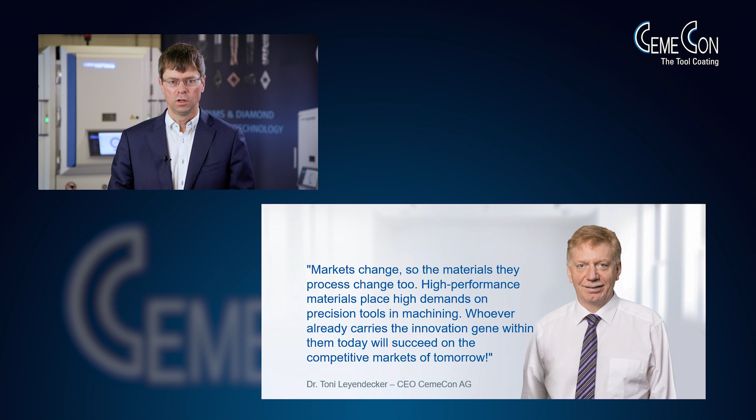Today, about 80% of all tool coatings based on titanium aluminum nitride. I would like to talk to you about diamond and HiPIMS, the logical development or following technology out of sputtering for cutting tools, for cutting tool coatings, and what is the market impact for your products out of these technologies.

Where are future markets? And of course, there is definitely something to produce for cutting tools and for us as a tool coater.

In developed markets, like here in Central Europe or wherever, the average age of the population is steadily increasing. And of course, more people will need to go for a hip implant, a knee joint, or whatever to maintain their mobility. And of course, society in developed countries will donate the necessary money, the necessary funding into healthcare to give also people needing such implants a good life.

The production of these implants today is mainly out of chromium cobalt, a very nice market for cutting tools because chromium cobalt is very hard to machine. Here we need a dense coating, being good for a challenging material like chromium cobalt.

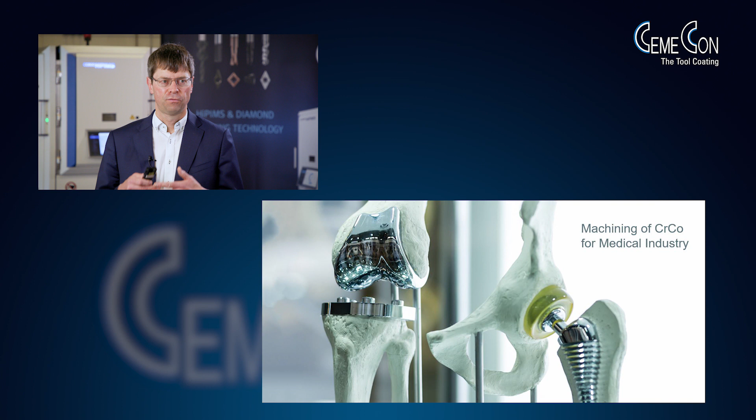And another thing is quite special in this market. We need a perfectly machined object because these implants are going into the human body, and every damage to the surface is a potential place where bacteria can nest, what of course is an absolute no-go and must be avoided. So smooth HiPIMS coatings generating a perfect surface are the first choice for such a product in the medical industry.

Another example from the medical sector is making dental implants from zirconium oxide, milling blanks from zirconium oxide with the individual shape and generate the implant online in a CAD/CAM system. A fully new way of doing this.

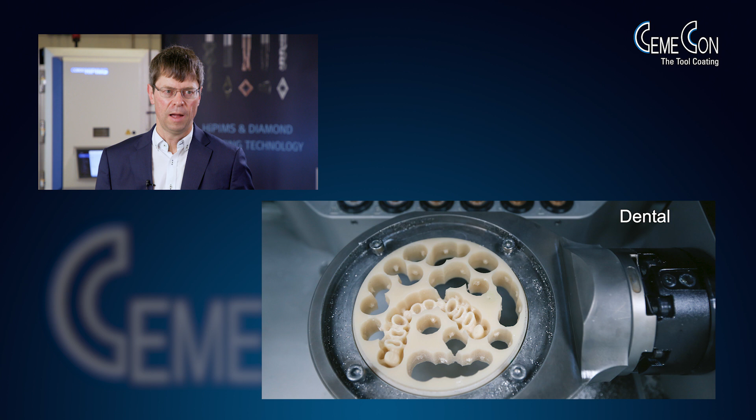The good thing for you as a cutting tool maker, you can use your tool making knowledge together with our diamond coatings for a new market, which is not subjected to the typical ups and downs in metal cutting industry and in engineering.

Well, we all have learned in the last half year how essential communication to all of us is. We all have sat hours and days in front of Teams, Zoom, and whatever video system. And 5G technology, the next thing in communication, will come. And we all will invest in this to be prepared for a similar situation like what we face in the moment.

A telephone, a tablet is today a metal frame, aluminum, some are made out of stainless steel or titanium, and a lot of milling tools are used to shape these frames and to generate a perfect surface. Here it's about milling tools, micro milling tools.

For micros, you must have a droplet-free surface. Droplet-free is HiPIMS, so that's a quite big benefit for micro tools. And the other thing, a micro has a very sharp geometry, so you must find a way to bring down the stress in the coating so that you have fully coated cutting edges.

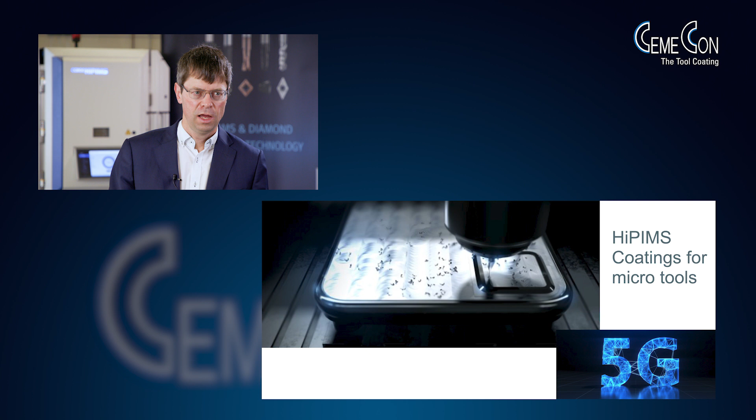Communication and medical industry are definitely rather interesting markets where we can immediately generate new business with HiPIMS coatings.

You might now ask, what is so special about this technology? Why is it so different? When you just take a look into a HiPIMS machine, the first thing you notice is this very bright, very white color of the cathodes, already indicating just from the color impression that there is by far more energy in the plasma than what you used to know from any other process.

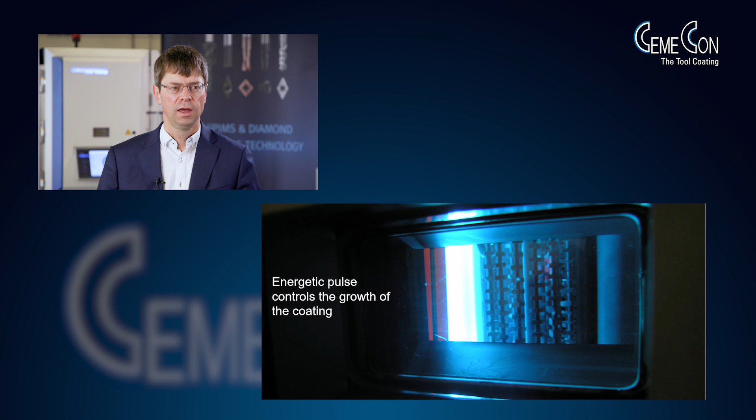That's the basic idea behind HiPIMS: not putting the power constantly on the cathodes, but putting the power in short power pulses, high power impulse magnetron sputtering on the cathode. In the pulse, enormous amounts of energy, giving an almost 100% plasma ionization, but it's still sputtering. So you keep a droplet-free coating and you add energy to the process.

Here, it's clearly visible from the geometry that the coating must be very tough, very dense, and you must find a way to bring down intrinsic stress to cover such a sharp geometry homogeneously. Stress management, that's a fully new thing, what you can do by tailoring the HiPIMS pulses in the right way.

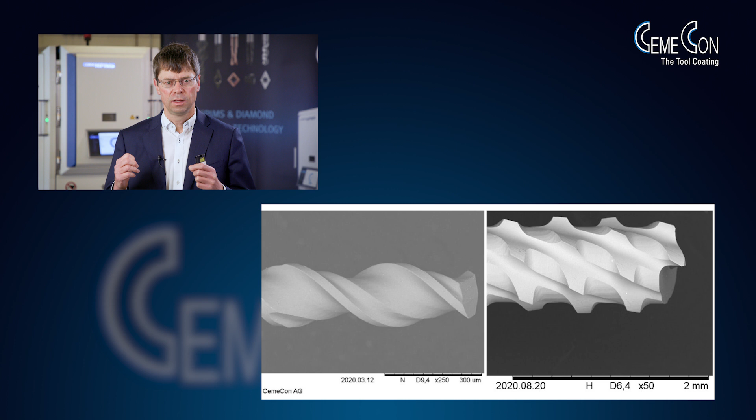Another very good example from a fully different type of tool, indexable inserts, is Ferrocon Quadro, the first product with 12 micron PVD coating, a so far fully impossible coating thickness.

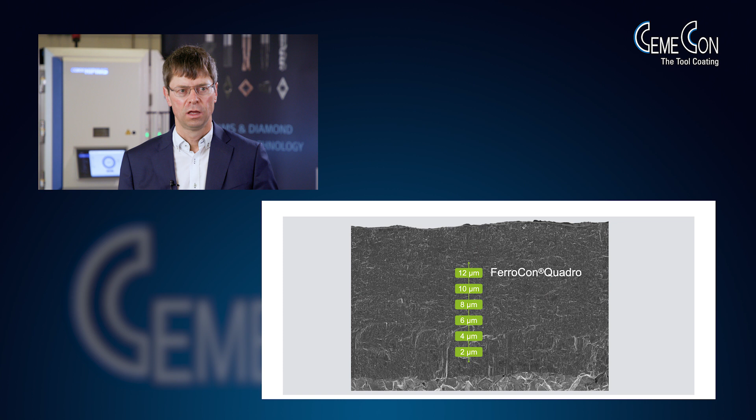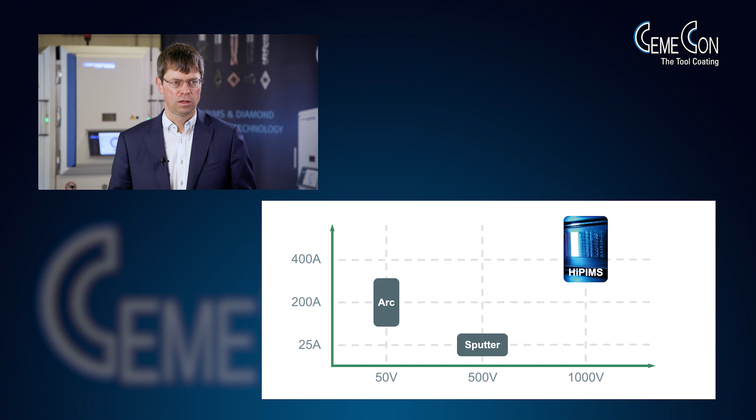You might now ask, why is HiPIMS so different from other technologies, from other traditional coating technologies? The point is that in the pulse, where the plasma is generated from the cathodes, we have at the same time high voltage and high amperage, driving a lot of energy into the plasma. And this makes it so different from other things where you have either high voltage or high amperage.

Well, we talked about stress management. How can we come a bit closer into this quite difficult technology? Well, from your tool point of view, you grind a nice surface, you prepare your cutting edge, you do a honing process, and then you give it to a coater, and when you get it back, you see this.

Spallation of the coating, peeling, or the cutting edge is no longer coated fully. You see at some spots even the carbide. Obviously, the intrinsic stresses in the coating were not fitting to the geometry. Well, how to avoid this?

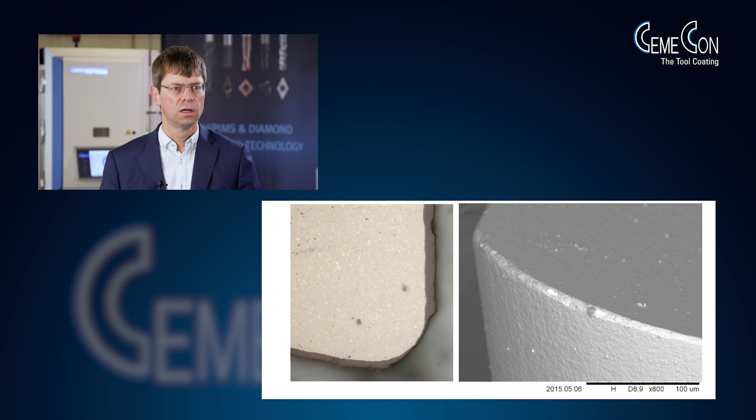The key technology step forward in HiPIMS is that we as CemeCon were not just looking into putting pulses on the cathode, but analyzing the process and synchronizing the pulses on the cathodes with what's going on the bias table. On the bias is your tool placed and is receiving the material from the cathodes.

From the cathode is coming during the pulse the metal from the target. That's of course what we want for making the coating. But on the other hand, there are in the plasma, just from the nature of the process, some unwanted additional species. These should not go into the coating grid because they distort the grid and create stress. The thing in HiPIMS synchronization for selective ion biasing is attracting the metal coming from the target, that's what we want, and suppressing the unwanted parts.

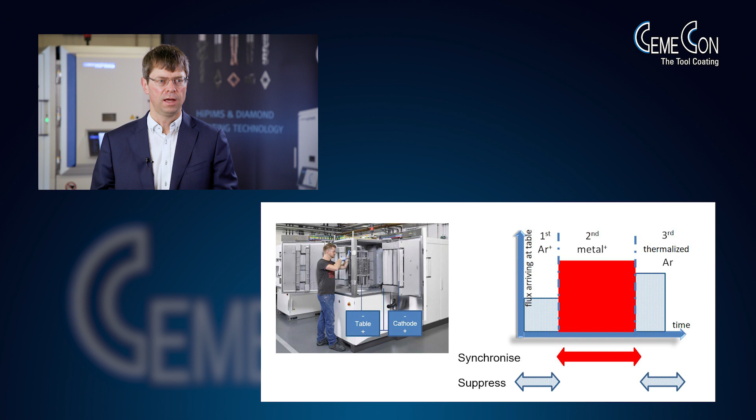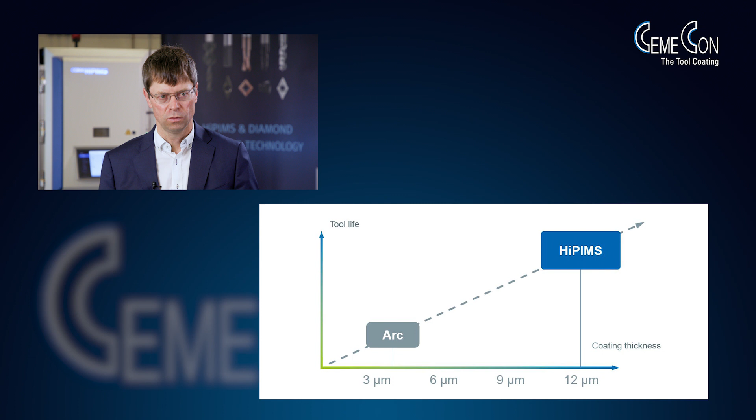This process knowledge is now incorporated in our CC800 HiPIMS and is key to bringing down intrinsic stresses in coating. When you incorporate this machine in your production, you can apply it in-house on your products. The benefit is you can increase coating thickness a lot. In traditional technologies, your limit on an industrially produced insert will be around 4, maximum 5 microns. Now with stress management, we can do it on an industrial scale with 12 microns with Ferrocon Quadro, day after day in standard production. This is a real step forward and makes HiPIMS and the CC800 HiPIMS very different from a CVD process where you can apply a thick coating, but always with tensile stress.

Tensile stress is okay for turning, but is a no-go for interrupted cutting like milling. And the market is clearly going for heavy-duty machining in the milling direction.

The good thing in HiPIMS is control over the process. Intrinsic stresses are not bad by their very nature. When you go into a church, the roof is only supported by stresses on the keystone, or the bridge you are driving over is only capable to bear vertical loads by highly stressed steel wires in the concrete. There are applications in the cutting tool market where some intrinsic stress is helpful.

Here's a typical example from the mold and die market: a ball nose end mill where we need abrasion resistance and hardness to machine, for example, 65 Rockwell hard material. So the point is we can actively influence intrinsic stresses with the CC800 HiPIMS if we want them, and influence them in the right way and the right value. That's one of the key points of the HiPIMS technology and the CC800 HiPIMS. You can do the full range of products with very different properties and very different requirements.

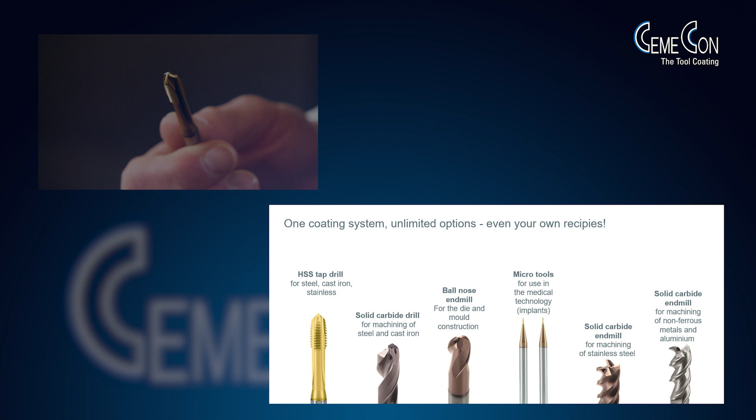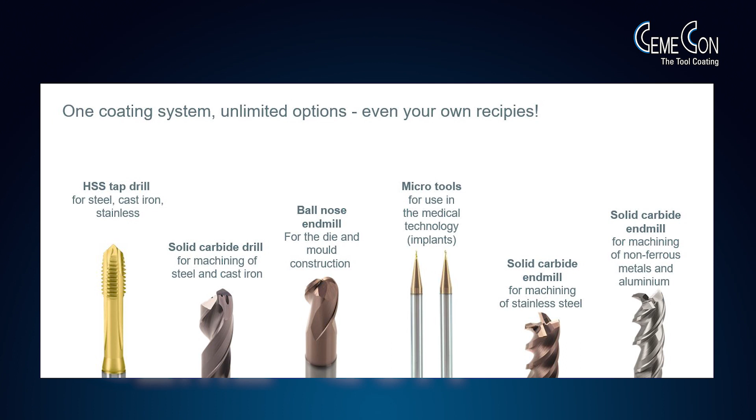Here from a tap drill, where everything is about reducing friction, droplet-free coatings, having low torque while tapping. In the middle you see a micro cutter, droplet-free, low stress, to have a thin coating around a very sharp geometry. On the right hand side you see milling cutters where you would like a bit more thickness, but you must have toughness in the coating to fulfill interrupted cutting on the best possible level.

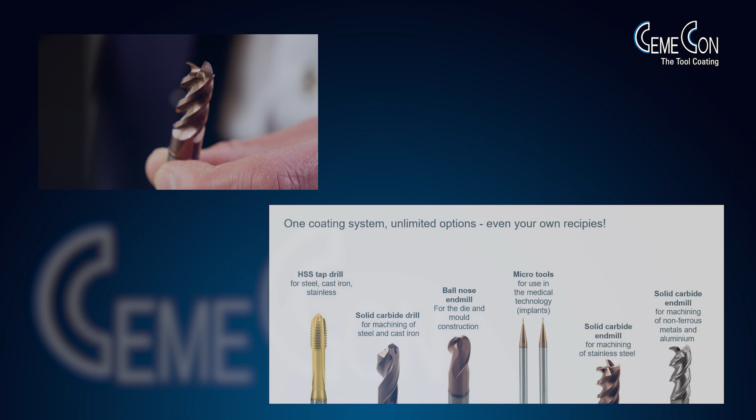The same goes for indexable inserts, a completely different type of tool. Also here quite a variety. On one side we see an insert with an aluminum geometry, quite sharp. This is also a good example for the flexibility of the CC800 HiPIMS. The coating here is titanium diboride, a material you can easily sputter but not with any other technology, and it avoids the adhesion or sticking of aluminum to carbide. A good example to show the flexibility and versatility of the CC800 HiPIMS.

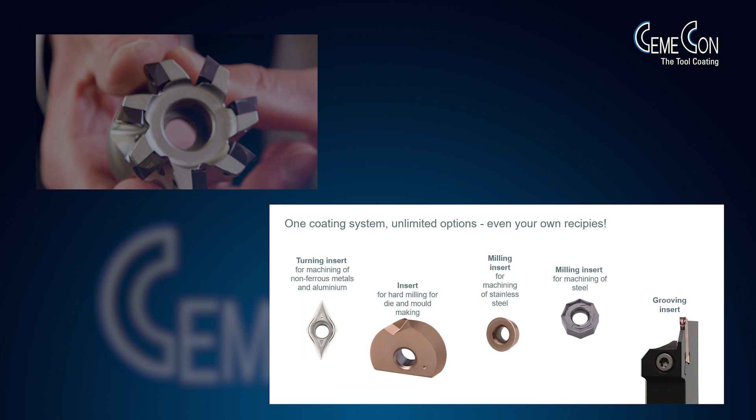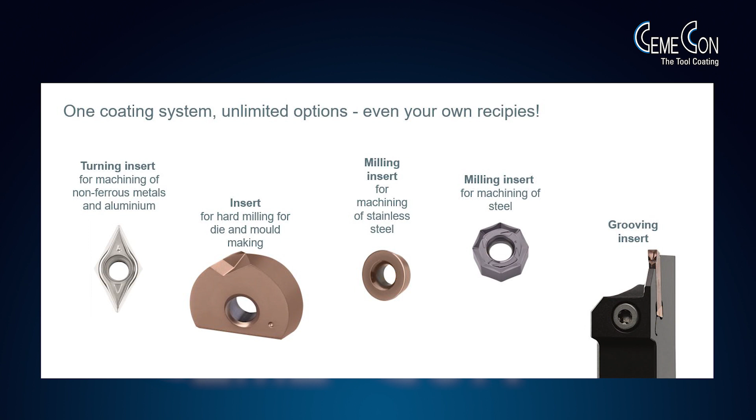You can deposit almost any material on any substrate, whether it's carbide, CBN, or ceramic. On the other hand, with the same machine and different process data, you can do a very thick coating like Ferrocon Quadro on a heavy-duty milling insert, like this octagonal insert in the middle. On the right-hand side, grooving is an interesting market where not so many producers are, so a more open field. You always have sharp corner edges. The big benefit in HiPIMS is you have a dense film with low stress, and you can easily cover these crucial corner points well, with an undisturbed cutting edge. And of course, grooving is always interrupted cutting.

Low compressive stress from the HiPIMS process and the CC800 HiPIMS is very beneficial to such a grooving tool.

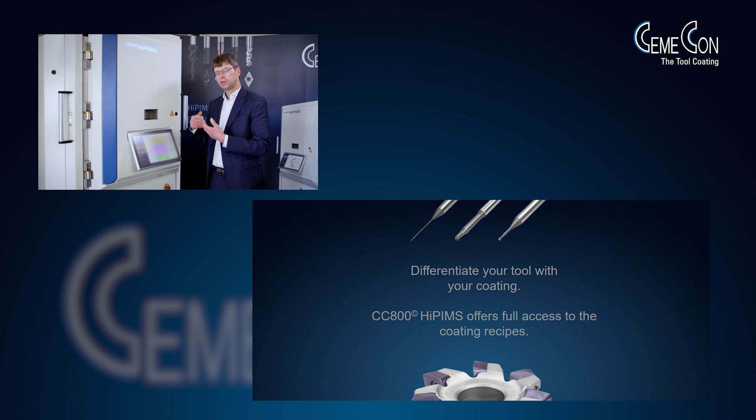Starting from the basic screen of the machine, where you see the selected process and operation status for the typical operator, a development engineer can go a level deeper into the process itself. Here you can see all the data, the complete process setup, and by pressing on any of these command lines you get full access to all data, whether it's power on the cathode or synchronization data down on the table, and you can actively change and modify them according to your coating design and your product, so you can create your own proprietary coating.

The decision for a certain coating technology and for a machine like the CC800 HiPIMS was never so easy as today. In this table I try to summarize some key points for your decision. The good thing in HiPIMS is we are 100% droplet free. That's the reason this process is different from all others. It's very suitable for microtools, a booming market. We can do very thick coatings with low compressive stresses.

That's a big difference from CVD. Also in CVD you can do thick coatings, but always with tensile stresses, which is a clear no-go for interrupted cutting like milling. That you can do in HiPIMS. And a HiPIMS machine is very easy to operate. You have no precursor gases, and you can simply integrate it into your production.

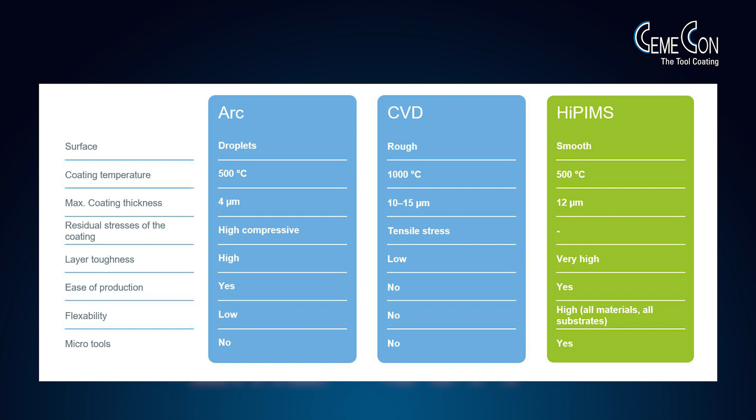The big point in HiPIMS is prime quality, ease of operation, dense coating, low intrinsic stress in one technology, one unit, the CC800 HiPIMS, for all tools, whether round shank tools or inserts, from 1 micron to 12 micron in one unit. I think this is why we see a very strong market reception of the CC800 HiPIMS, and we clearly believe this is the way forward for cutting tool coatings.

There are a number of applications in the cutting tool market where you need diamond, the hardest material on earth. Your cutting tool, your geometry, your edge honing, together with this super hard material coming from the CC800 diamond, brings us into markets with promising cutting tool business for the future. The interesting thing is there are also a number of markets outside traditional engineering, and I would like to show you some applications where we are sure we will have beneficial business in the upcoming years.

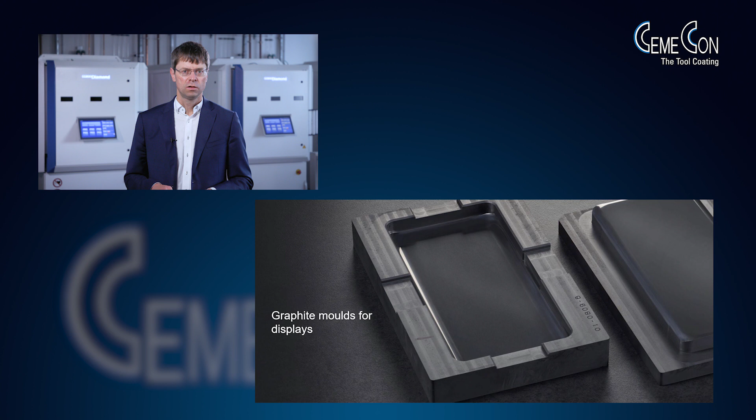The classical application for diamond coated tools is graphite machining, typically for electrodes for EDM machining. Here you see a mold. Such a mold is used for pressing glass, for cell phones or tablet computers. Here we are again in communication, a consumer industry that's definitely booming, and especially telephones for schools or other applications are a clear trend. Now you can use your graphite tools together with our diamond coating for such a market like communication.

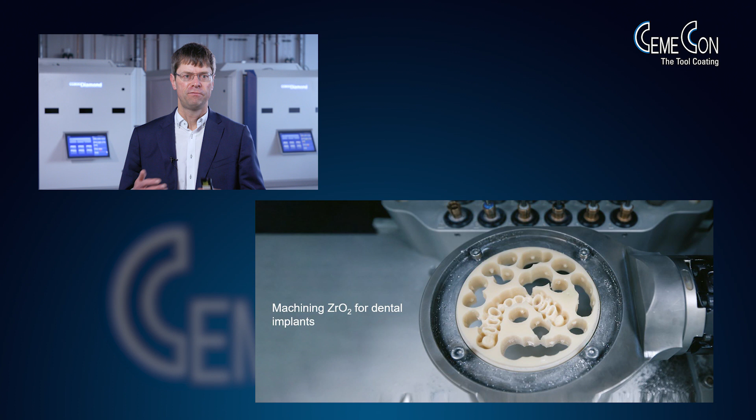The other pretty new application is the production of dental implants. Traditionally they would have been made in a laboratory, offline from your dentist. Today there are small chairside systems on the market where a model of your teeth is directly scanned, and with milling cutters a copy is made into zirconium oxide blanks to generate your implant while you are visiting your dentist. The good thing here for you as a cutting tool manufacturer is that, from the geometry point of view, such a tool is very similar to a graphite cutter - a typical ball nose geometry, together with our engineered coatings, engineered over 20 years of experience. You can provide cutting tools with your existing equipment into the dental and healthcare market, which is by far more stable than every engineering application.

Well, you like challenges, we do. One of the most interesting challenges in the cutting tool world is machining cemented carbide in the hard state. You might know this from your customers, or when you produce cutting tools and wear parts: you will have a number of applications in your workshop where you have to machine, to shape sintered parts, which you would typically do today with EDM machining or grinding. Directly machining with a milling cutter is much, much faster and generates enormous savings for the end user, which of course the end user is willing to pay you for the cutting tools.

This new product, CCDia CarbideSpeed, is the essence of 20 years of CemeCon diamond technology incorporated into the CC800 diamond. Here we need the best possible adhesion of the diamond on the substrate, so we re-engineered the chemical preparation of the carbide, and also the process in the coater itself is made to handle this super challenging application in the best possible way.

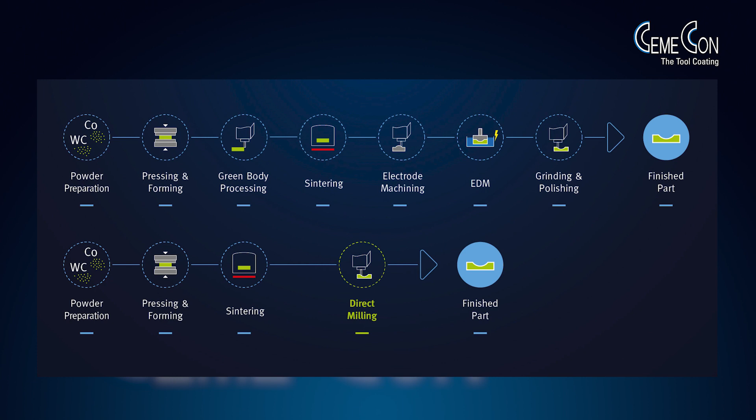Ladies and gentlemen, I hope I could show you a little bit how we see the future and the direction in PVD HiPIMS and in CVD diamond, where we do see prospering markets, and they are there.